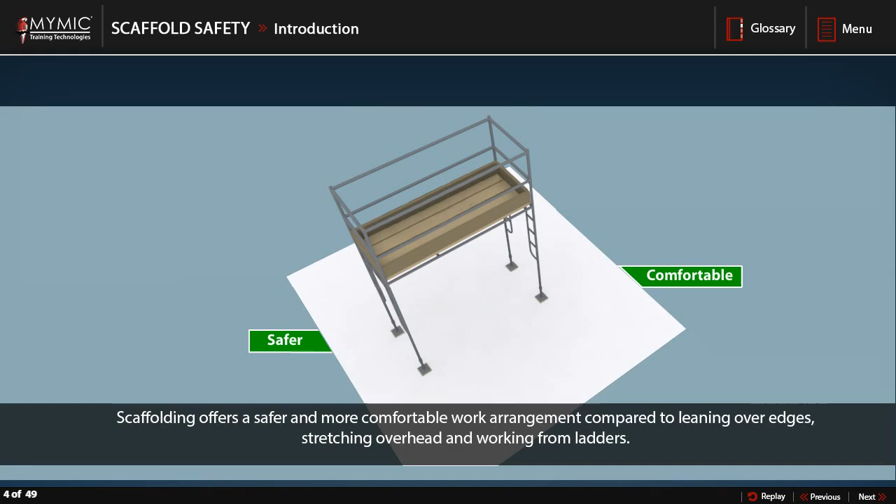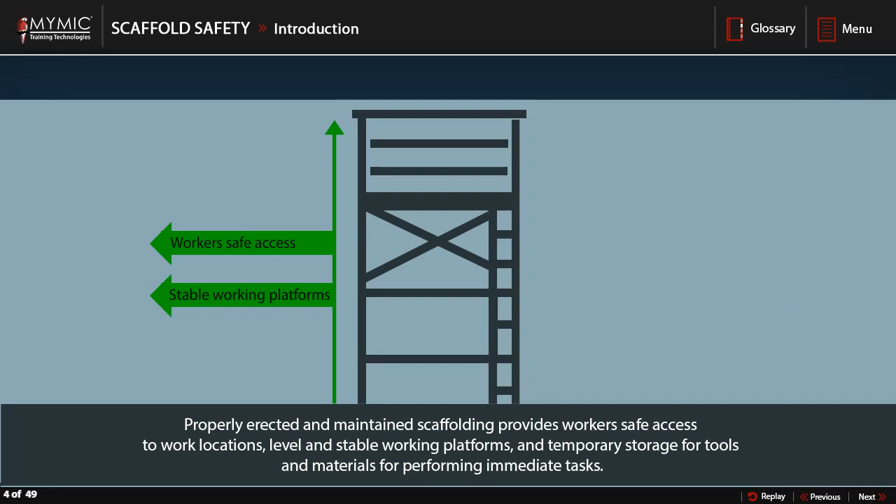Scaffolding offers a safer and more comfortable work arrangement compared to leaning over edges, stretching overhead, and working from ladders. Suitable and sufficient scaffolding must be supplied for work at elevations that cannot be accomplished safely by other means. Properly erected and maintained scaffolding provides workers safe access to work locations, level and stable working platforms, and temporary storage for tools and materials for performing immediate tasks.

In this program, you will learn the basic scaffold types and information to help you in selecting the right scaffold for the job. You'll also learn the guidelines for proper scaffold use, safe erection and dismantling procedures, and how to prevent damages to scaffolds by maintaining and storing them properly. In safe work practices, you'll learn how to work safely on scaffolds by avoiding falling hazards with the help of guardrails and toe boards, wearing safety harnesses, or the appropriate PPE. Finally, it covers safety training, which is required to use scaffolding safely.

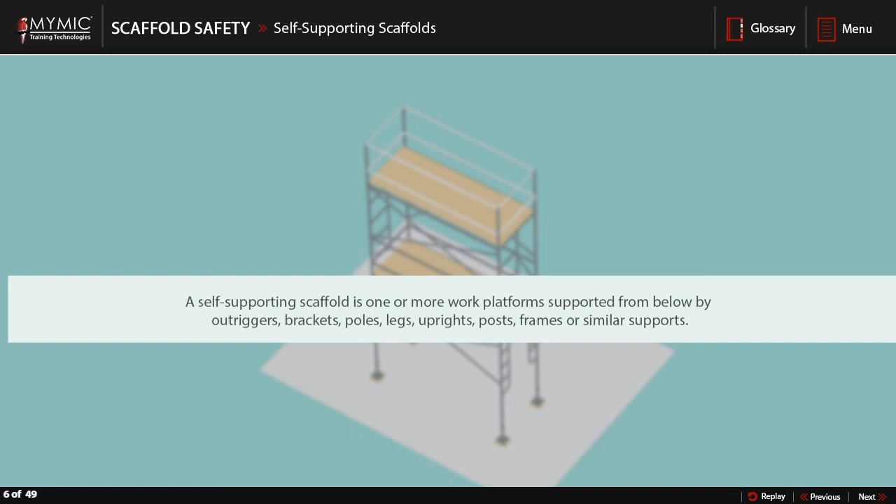Self-supporting scaffolds. A self-supporting scaffold is one or more work platforms supported from below by outriggers, brackets, poles, legs, uprights, posts, frames, or similar supports. Fabricated frame scaffolds are the most common type of scaffold because they are versatile, economical, and easy to use. The existing platforms remain until the frames are set, braced, and joined with stack pins. It must be designed by a registered engineer when over 125 feet. They also require guardrails installed with cross bracing.

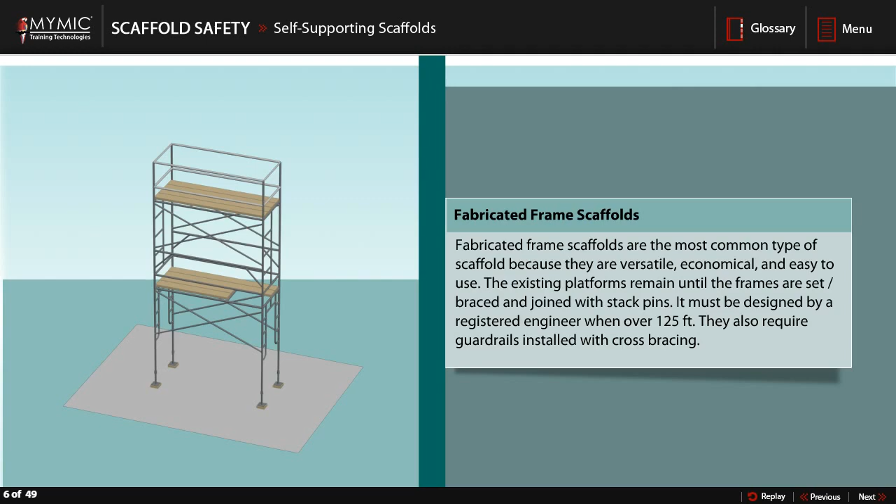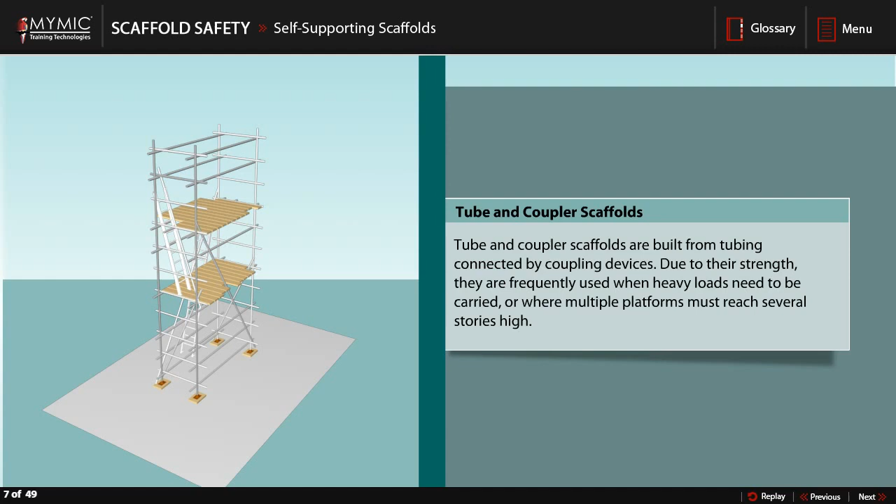Tube and coupler scaffolds are built from tubing connected by coupling devices. Due to their strength, they are frequently used when heavy loads need to be carried or where multiple platforms must reach several stories high. Mobile scaffolds are set on wheels or casters. They are designed to be easily moved and are commonly used for things like painting and plastering, where workers must frequently change position.

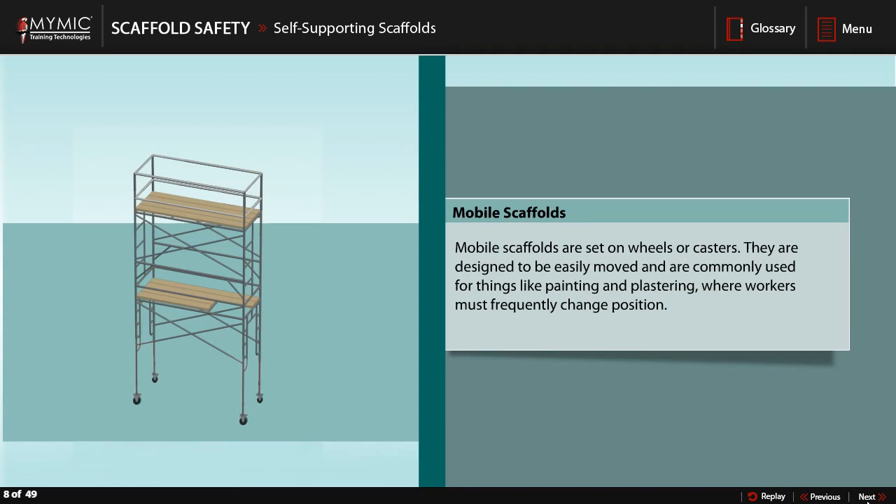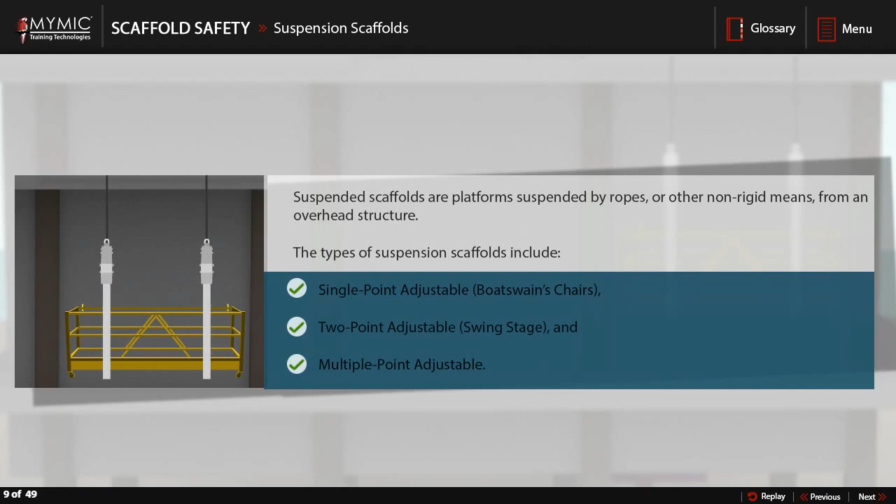Suspension scaffolds. Suspended scaffolds are platforms suspended by ropes or other non-rigid means from an overhead structure. The types of suspension scaffolds include single-point adjustable, Boatswain's Chairs, two-point adjustable, swing stage, and multiple-point adjustable. A single-point adjustable scaffold consists of a platform suspended by one rope from an overhead support and equipped with the means to permit the movement of the platform to the desired work levels.

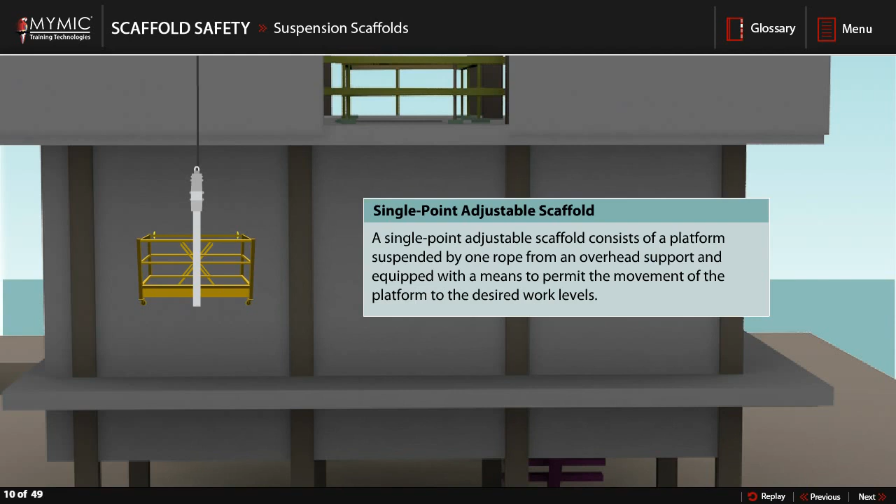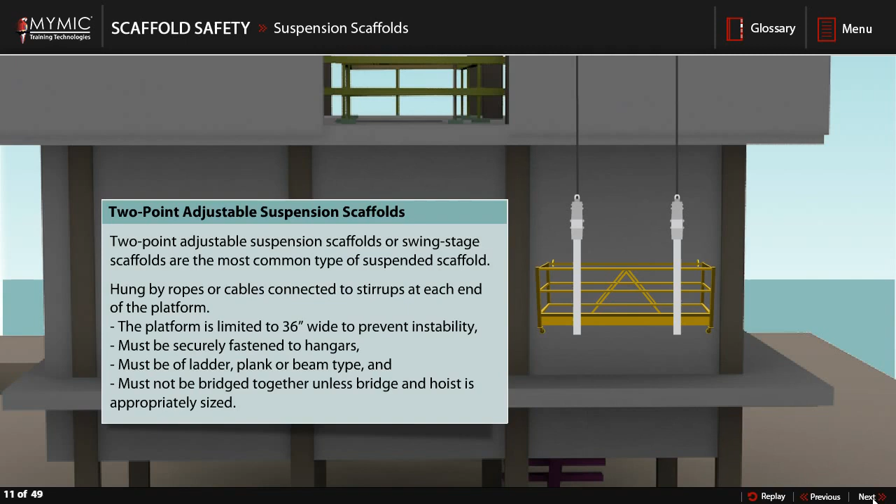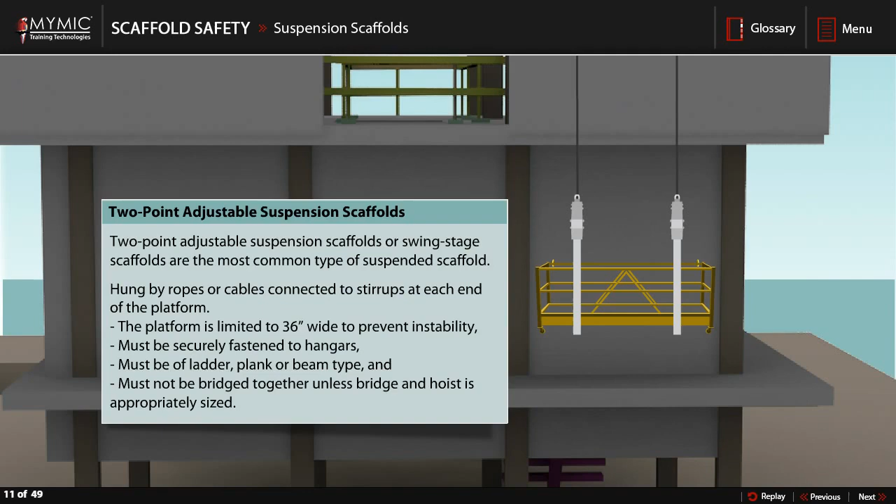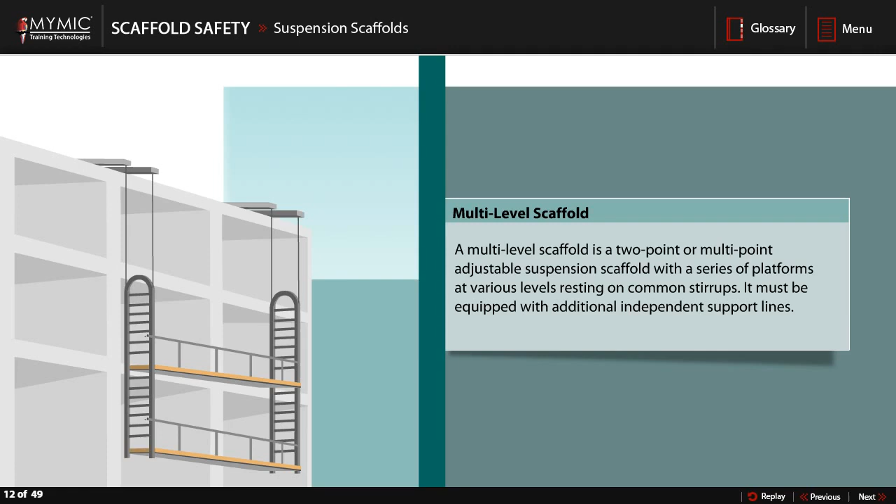Two-point adjustable suspension scaffolds or swing stage scaffolds are the most common type of suspended scaffold, hung by ropes or cables connected to stirrups at each end of the platform. The platform is limited to 36 inches wide to prevent instability, must be securely fastened to hangers, must be of a ladder, plank, or beam type, and must not be bridged together unless bridge and hoist is appropriately sized. A multi-level scaffold is a two-point or multi-point adjustable suspension scaffold with a series of platforms at various levels resting on common stirrups. It must be equipped with additional independent support lines.

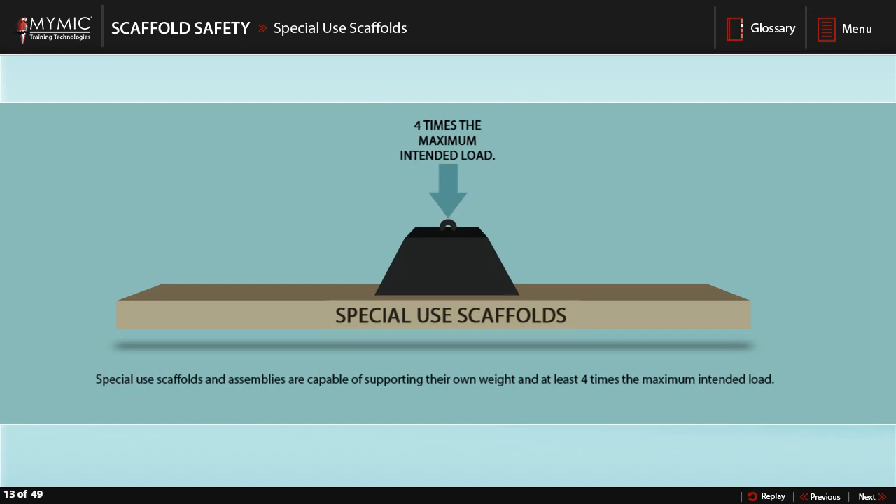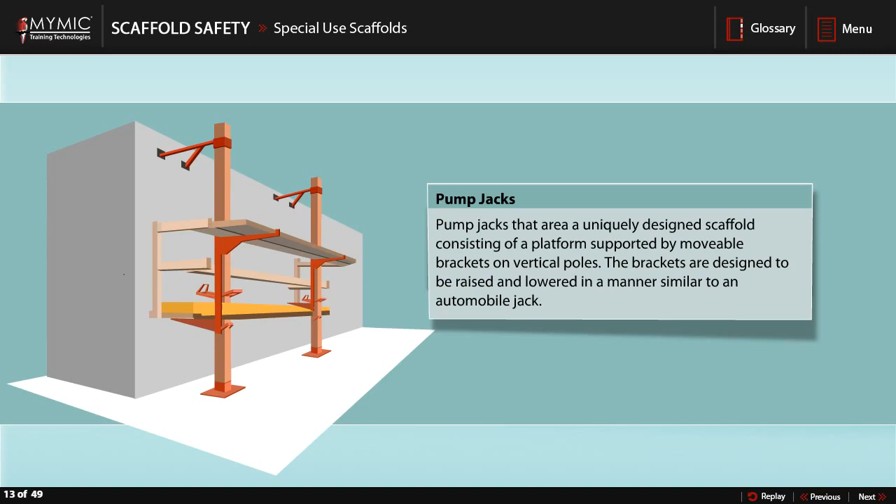Special use scaffolds and assemblies are capable of supporting their own weight and at least 4 times the maximum intended load. Some of the types of special use scaffolds include: 1. Pump jacks, a uniquely designed scaffold consisting of a platform supported by movable brackets on vertical poles. The brackets are designed to be raised and lowered in a manner similar to an automobile jack. 2. A ladder jack scaffold is a simple device consisting of a platform resting on brackets attached to a ladder. Ladder jacks are primarily used in light applications because of their portability and cost-effectiveness. Platforms should not be placed higher than 20 feet from the supported base.

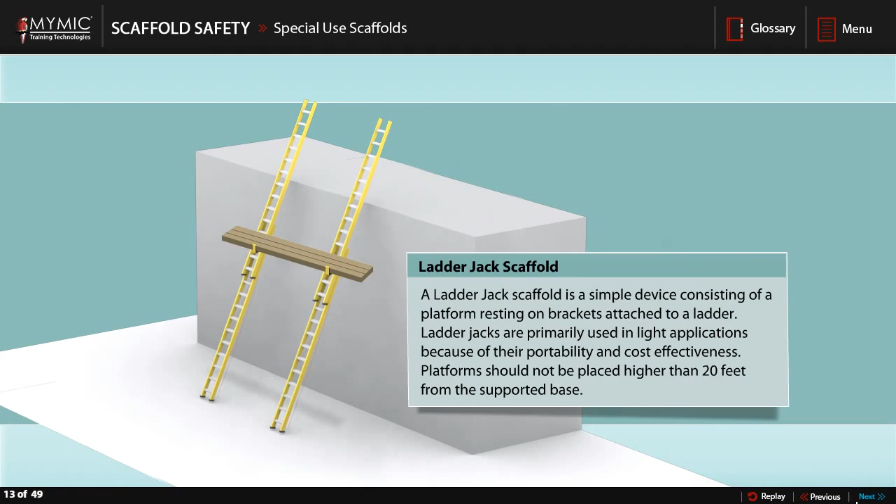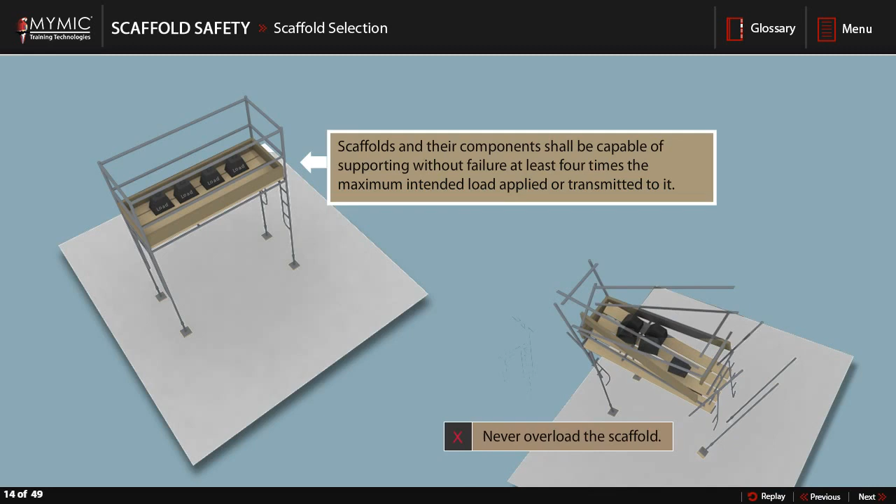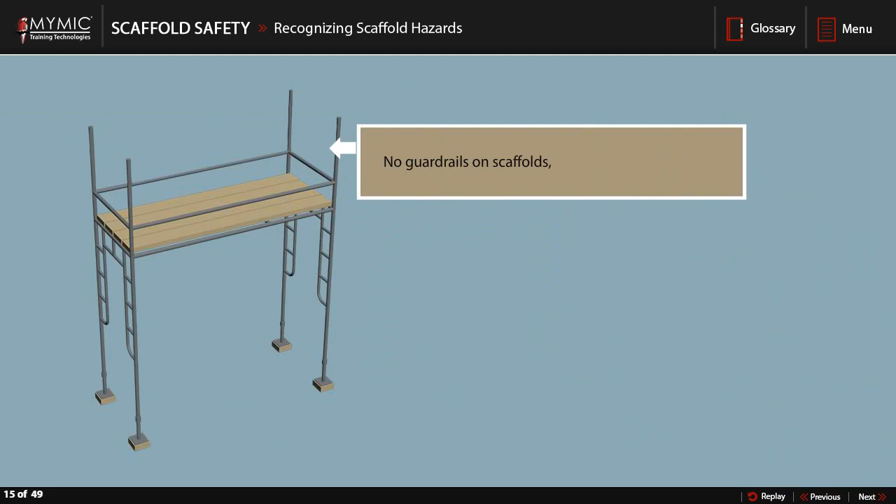Scaffolds and their components shall be capable of supporting without failure at least 4 times the maximum intended load applied or transmitted to it. Never overload the scaffold. The design load of all scaffolds shall be calculated on the basis of light, supporting 25 pounds per square foot, medium, supporting 50 pounds per square foot, and heavy, supporting 75 pounds per square foot. Some of the common scaffold hazards are no guardrails on scaffolds, defective wood planks and inadequate planking overhang, unsafe access to scaffold, cross-bracing not adequate, inadequate footings, and bridging of scaffolds.

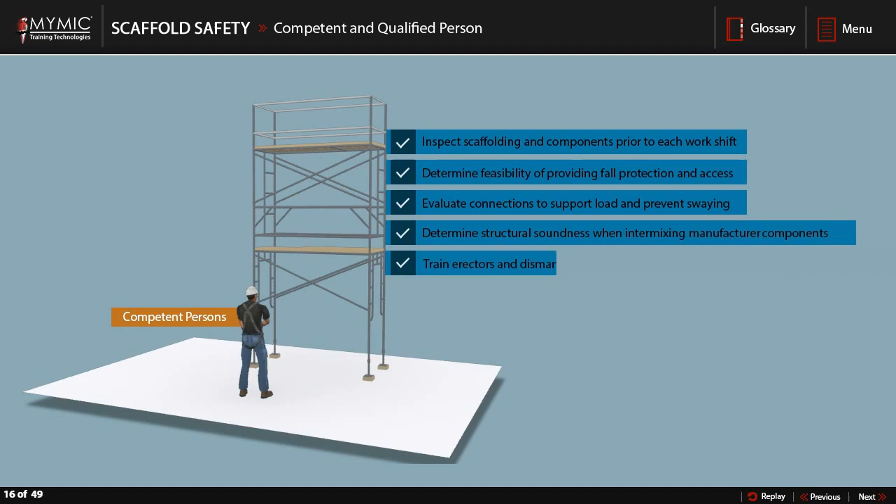A competent person must be capable of identifying existing and predictable hazards in the surroundings or working conditions. Their responsibilities include: inspect scaffolding and components prior to each work shift, determine feasibility of providing fall protection and access, evaluate connections to support load and prevent swaying, determine structural soundness when intermixing manufacturer components, and train erectors and dismantlers to recognize work hazards. Another person who is designated to ensure scaffold safety is known as the qualified person.

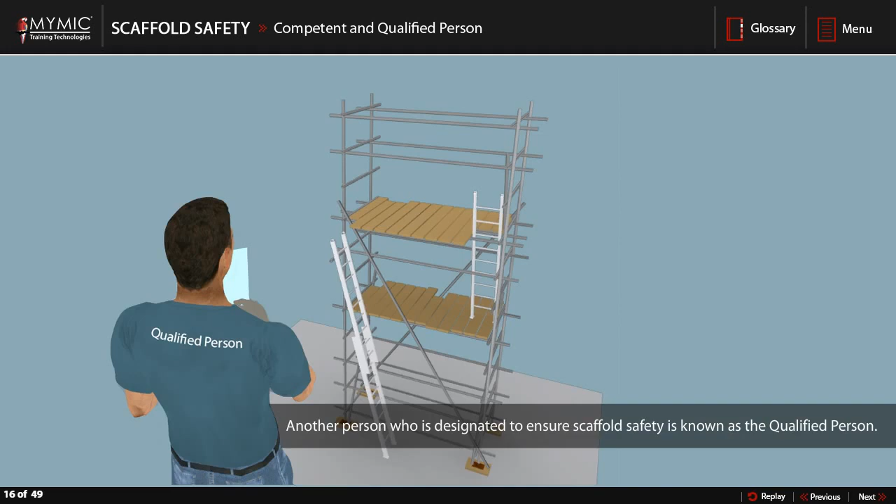A qualified person is one who, by possession of a recognized degree, or with extensive knowledge, training, and experience, is qualified to solve or resolve problems related to safe scaffold use. A qualified person may design a scaffold system to solve a site-specific problem.

To make sure scaffold components are in good working order, carefully inspect all scaffolding parts before and during its erection, and especially after changing weather conditions and prolonged interruptions of work. A defective or damaged part could affect the integrity of the whole scaffold.

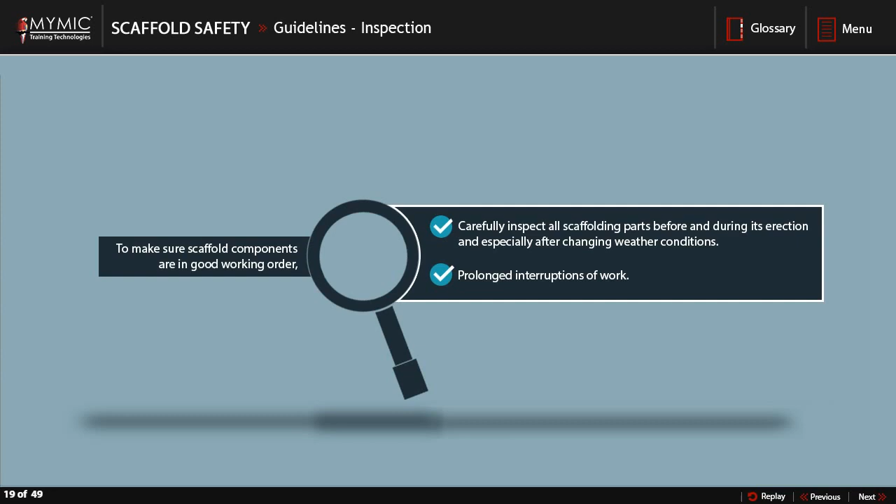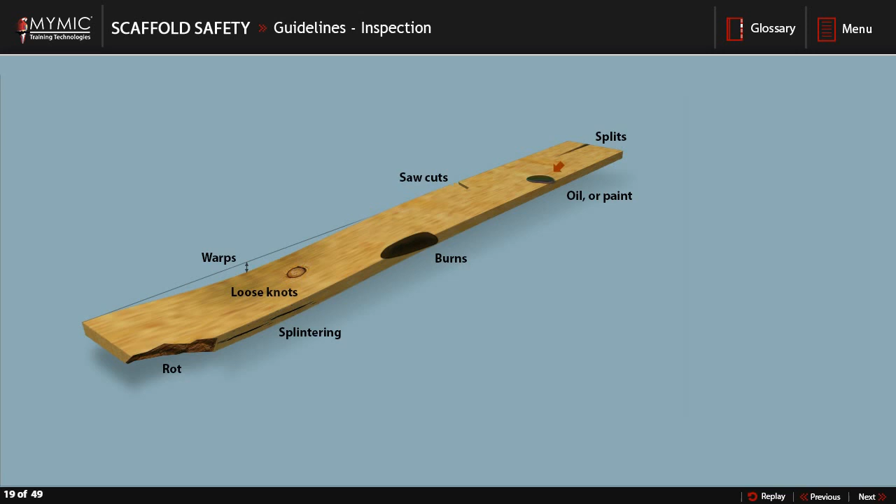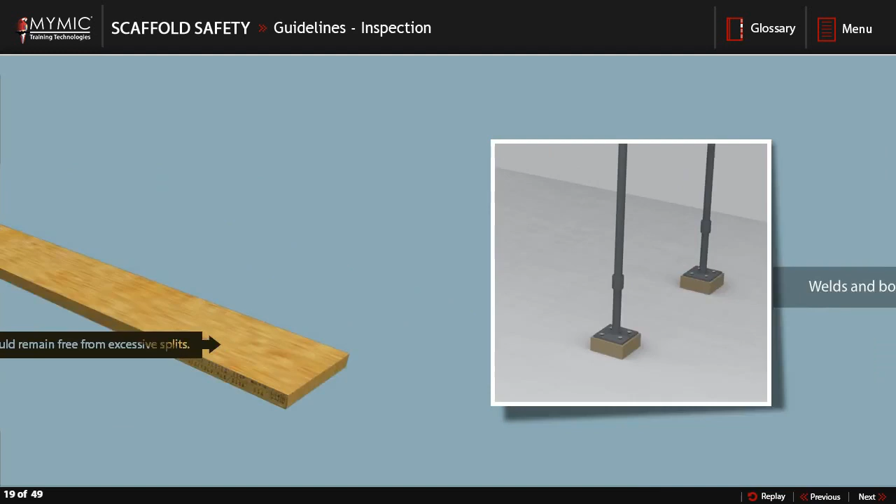Some areas to inspect include the following: planks and wood components free of splits, rot, burns, warps, saw cuts, any loose knots, splintering, oil or paint and opaque finishes that could cover potential defects. Planking shall be scaffold grade or equivalent and should remain free from excessive splits. Welds and bolted connections in good condition. Any damaged or weakened scaffold part must be immediately repaired or removed from service until it is repaired.

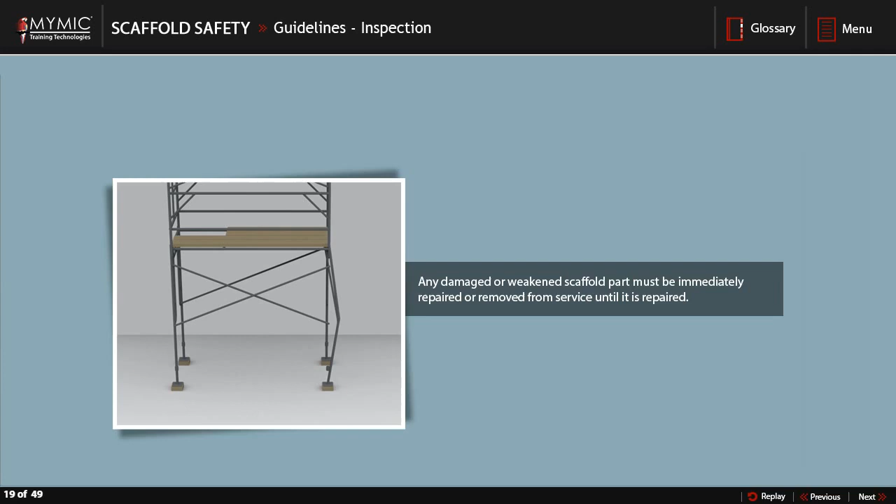Scaffold inspection tags are a vital part in creating a safe work environment for those who work on scaffolds. Some basics are: 1. Inspection and tagging of the scaffold is to be performed by a competent worker experienced in the erection of scaffold. 2. A unique scaffold identification tag number must be clearly identified on all tags for tracking purposes.

3. All scaffolds shall be inspected after the erection as per the Occupational Health and Safety Act requirements. 4. All scaffold identification tags will be of a solid green, yellow, or red color with black lettering. 5. All scaffold identification tags will have the front information displayed and must be completed for each tag.

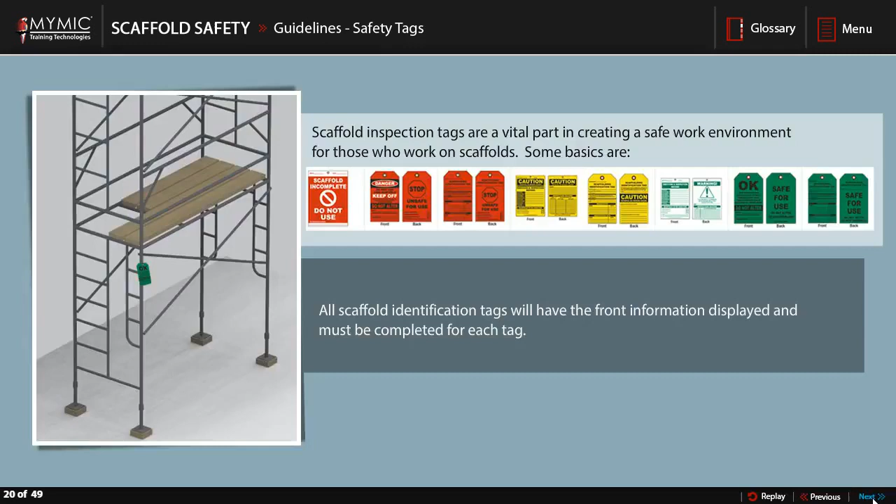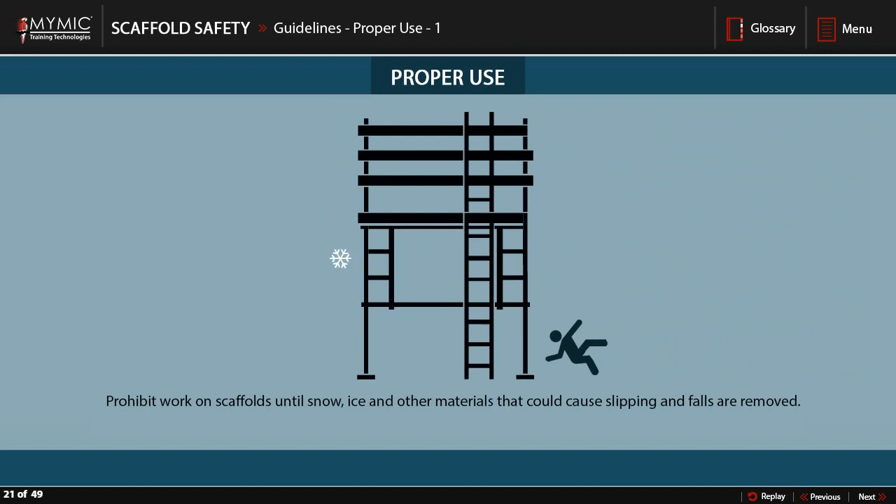Be certain that scaffolds and components are not loaded beyond their rated and maximum capacities. Prohibit the movement of scaffolds when employees are on them. Maintain a safe distance from energized power lines. Prohibit work on scaffolds until snow, ice, and other materials that could cause slipping and falls are removed. Prohibit scaffold use during storms and high winds. Protect suspension ropes from contact with sources of heat, welding, cutting, etc., and from acids and other corrosive substances.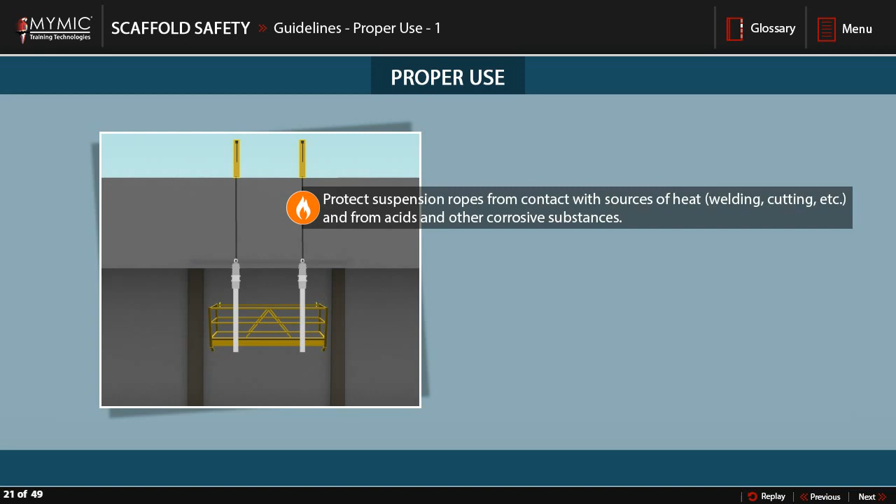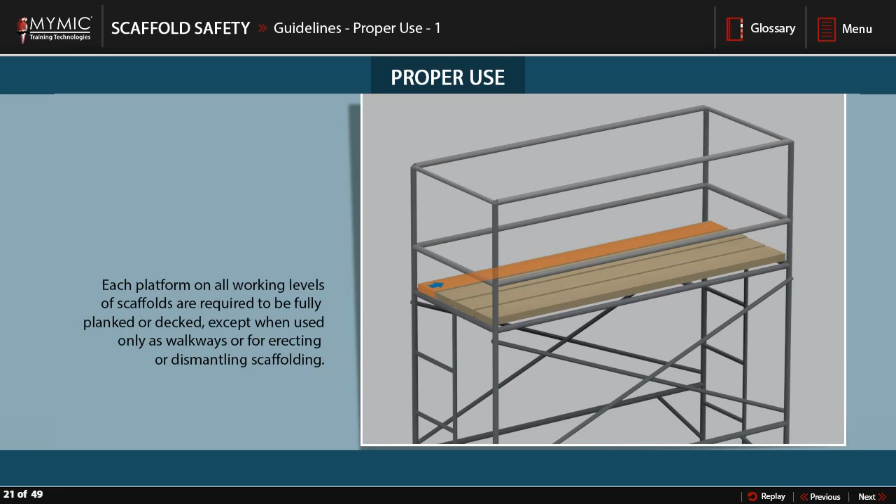Each platform on all working levels of scaffolds is required to be fully planked or decked, except when used only as walkways or for erecting or dismantling scaffolding. The platform and walkway must be at least 18 inches wide. Install each platform unit, plank, fabricated deck, or fabricated platform so that the space between planks and the space between the platform and the uprights is no more than 1 inch.

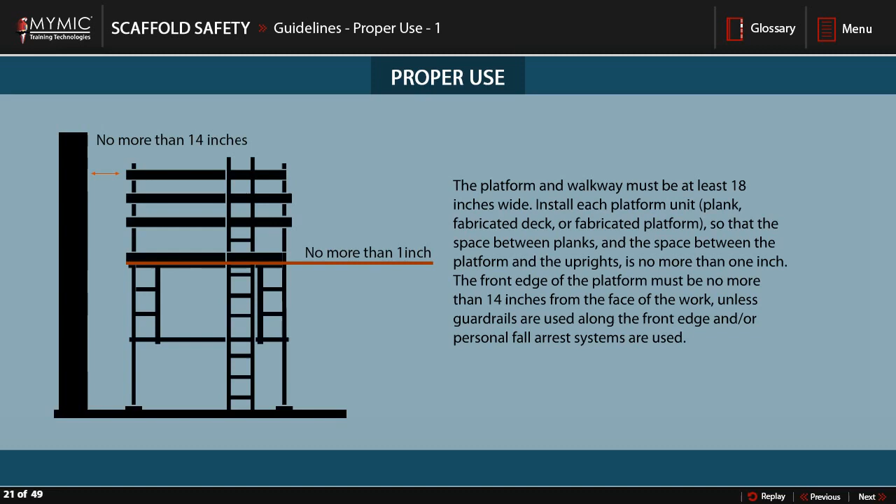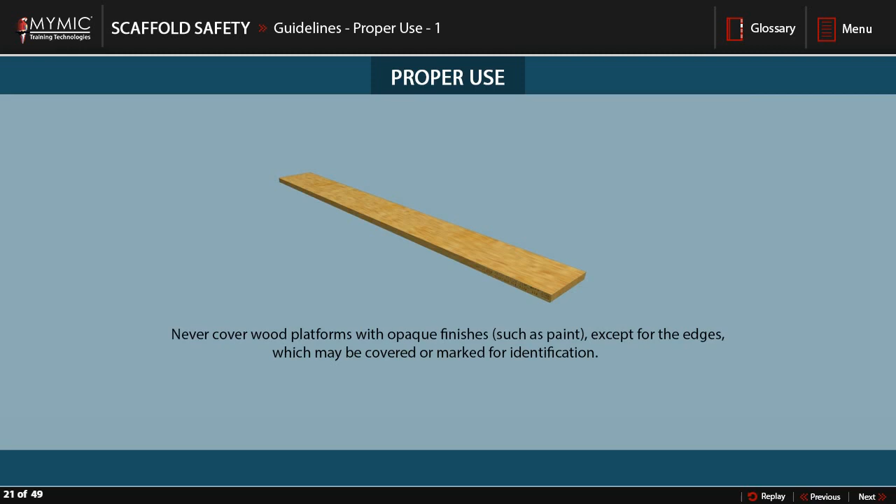The front edge of the platform must be no more than 14 inches from the face of the work, unless guardrails are used along the front edge and/or personal fall arrest systems are used. Never cover wood platforms with opaque finishes, such as paint, except for the edges, which may be covered or marked for identification. Remove debris and unnecessary materials from scaffold platforms. Prohibit the use of ladders and other devices to increase working heights on platforms. Report damage or defects to the competent person who will evaluate damage as well as take necessary corrective actions.

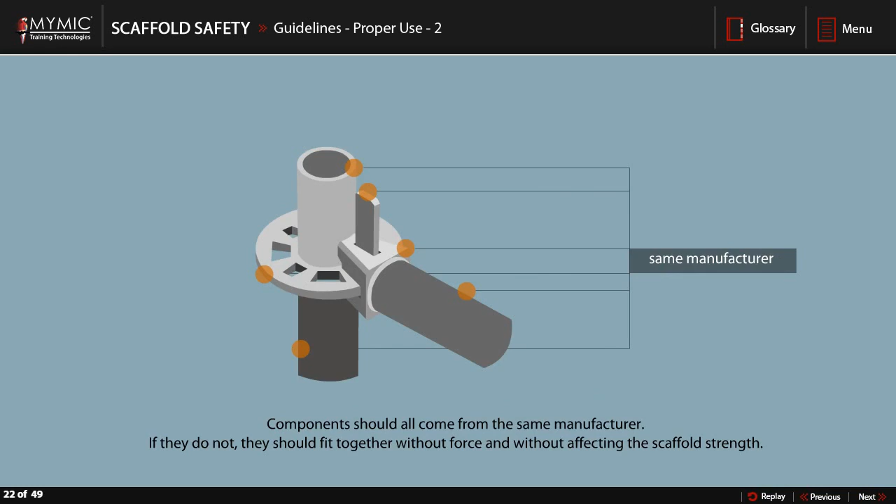Components should all come from the same manufacturer. If they do not, they should fit together without force and without affecting the scaffold strength. Do not modify components from different manufacturers to fit together without the competent person's approval.

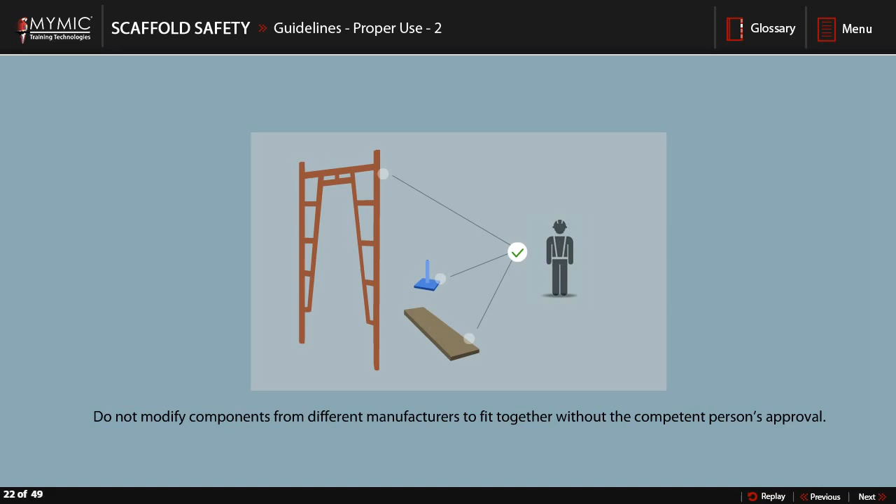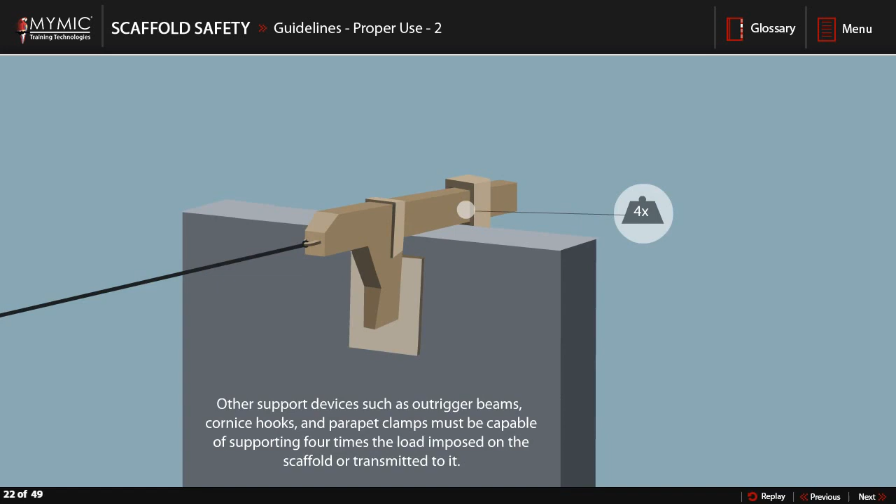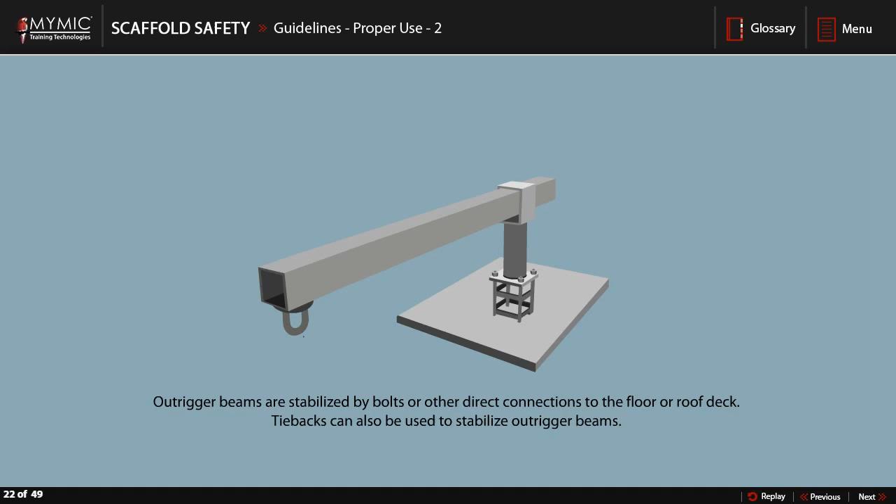On a suspended scaffold, support lines must be able to support 6 times the rated load capacity. Other support devices such as outrigger beams, cornice hooks, and parapet clamps must be capable of supporting 4 times the load imposed on the scaffold or transmitted to it. Outrigger beams are stabilized by bolts or other direct connections to the floor or roof deck. Tiebacks can also be used to stabilize outrigger beams.

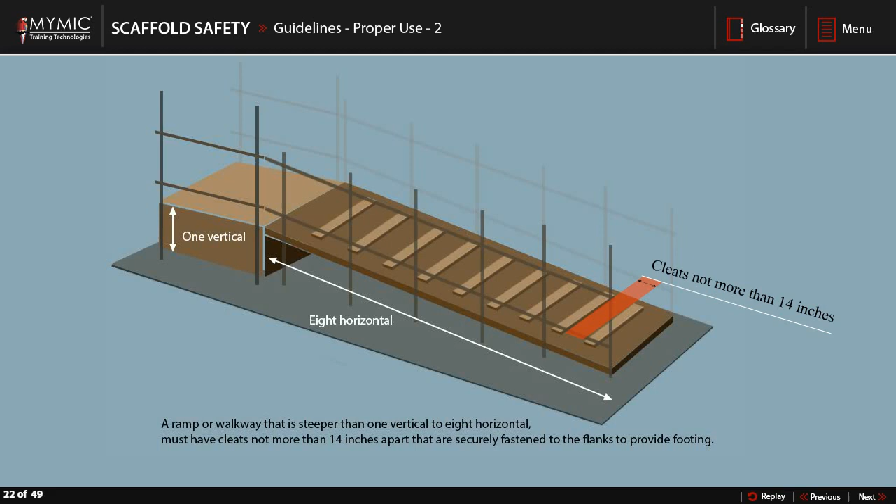All ramps and walkways that are 6 feet or more above lower levels must have guardrails. A ramp or walkway that is steeper than 1 vertical to 8 horizontal must have cleats not more than 14 inches apart that are securely fastened to the planks to provide footing. Ramps and walkways may not incline more than a slope of 1 vertical to 3 horizontal.

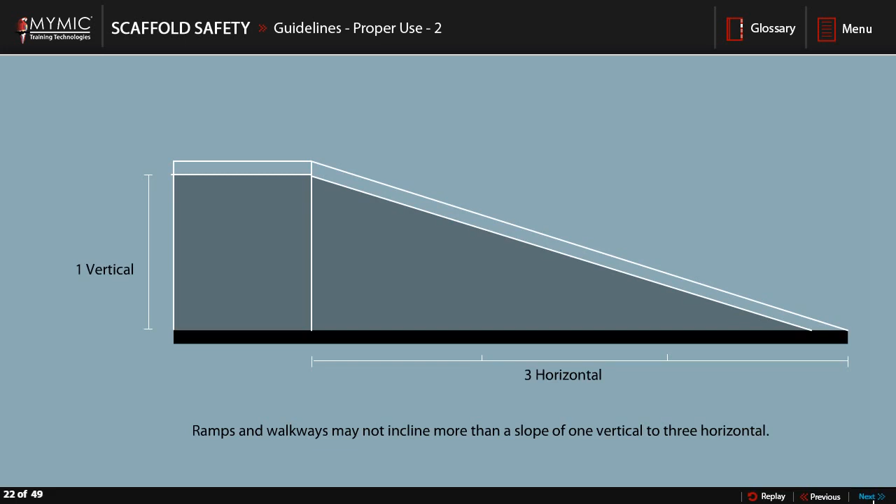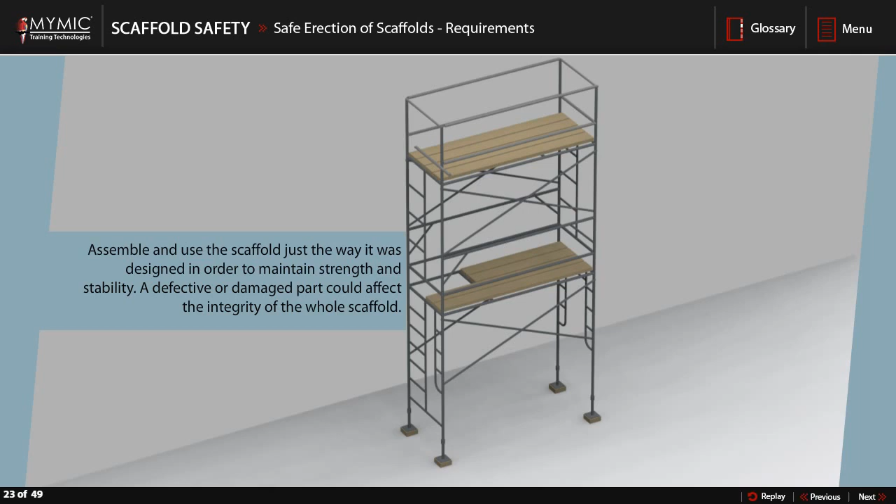Assemble and use the scaffold just the way it was designed in order to maintain strength and stability. A defective or damaged part could affect the integrity of the whole scaffold. Erect and dismantle all scaffolds according to the manufacturer's instructions and competent person's direction.

Pre-planning is necessary. Evaluation and preparation of the site. Identification of any potential hazards. Determining the type of scaffolding to be used, and activities to be performed and their weight requirements.

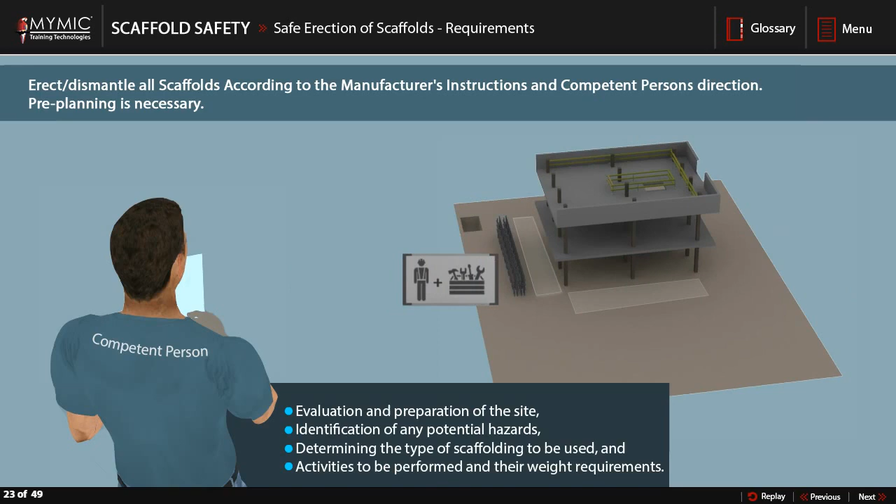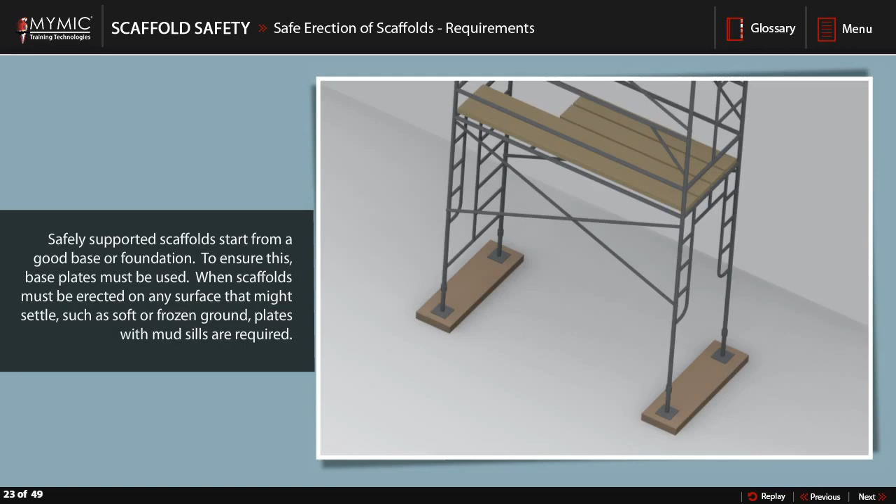Safely supported scaffolds start from a good base or foundation. To ensure this, base plates must be used. When scaffolds must be erected on any surface that might settle, such as soft or frozen ground, plates with mud sills are required. Many scaffold accidents occur when frozen ground thaws during work. A supported scaffold is never supported on boxes, loose bricks, or any materials that could be crushed or topple under scaffold weight.

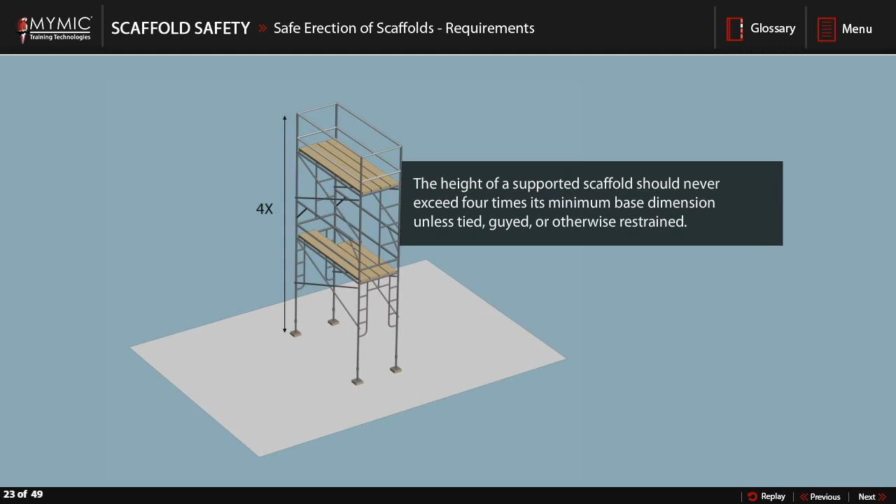Height requirements. The height of a supported scaffold should never exceed 4 times its minimum base dimension unless tied, guyed, or otherwise restrained. If greater height is required, outriggers can extend the base and serve as stability bracing to increase the base area.

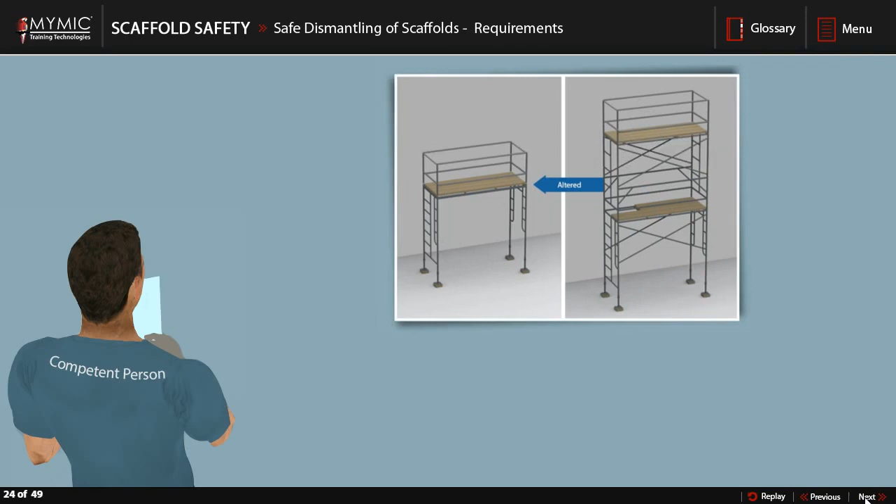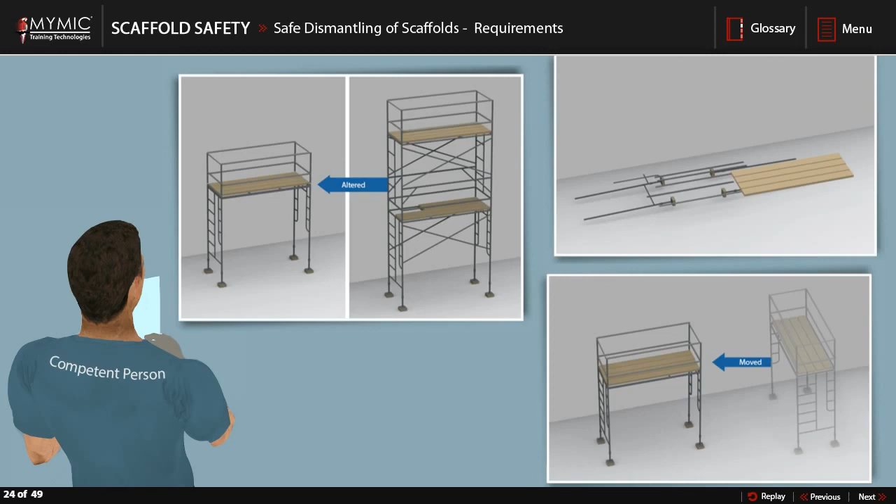Dismantling. Require that scaffolds be altered, moved, and dismantled under the supervision of a competent person. Alteration and dismantling activities should be planned and performed with the same care as with erection. Tag any incomplete scaffold or damaged component out of service. Before dismantling scaffolding, check that it was erected properly and that no structural alterations were made.

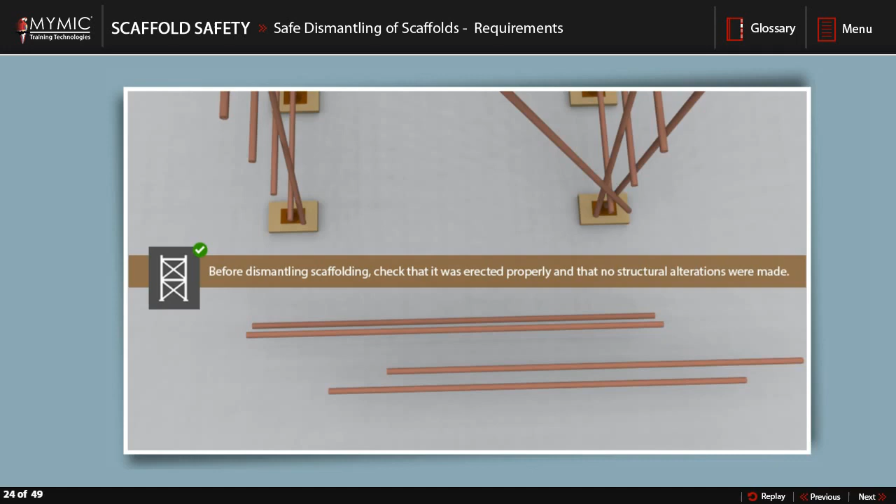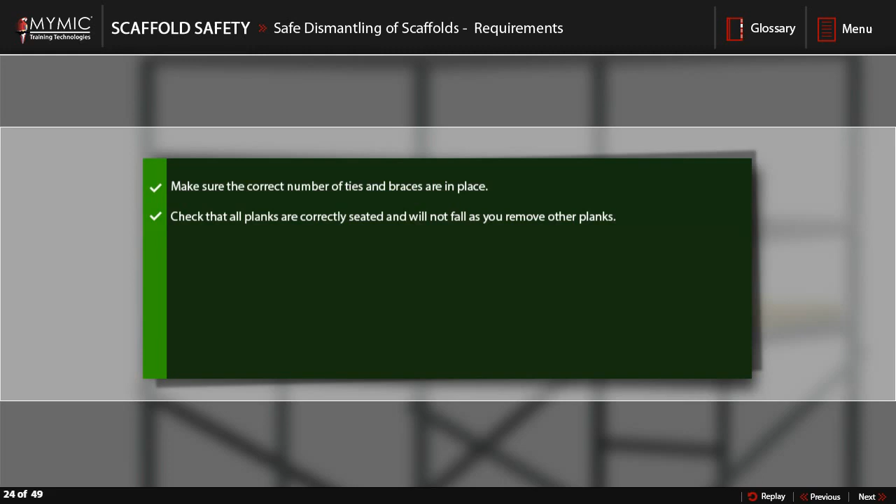Make sure the correct number of ties and braces are in place. Check that all planks are correctly seated and will not fall as you remove other planks. Lower all components to the ground by rope, hoist, or man-to-man, and in an orderly manner. Do not throw them off of the scaffold.

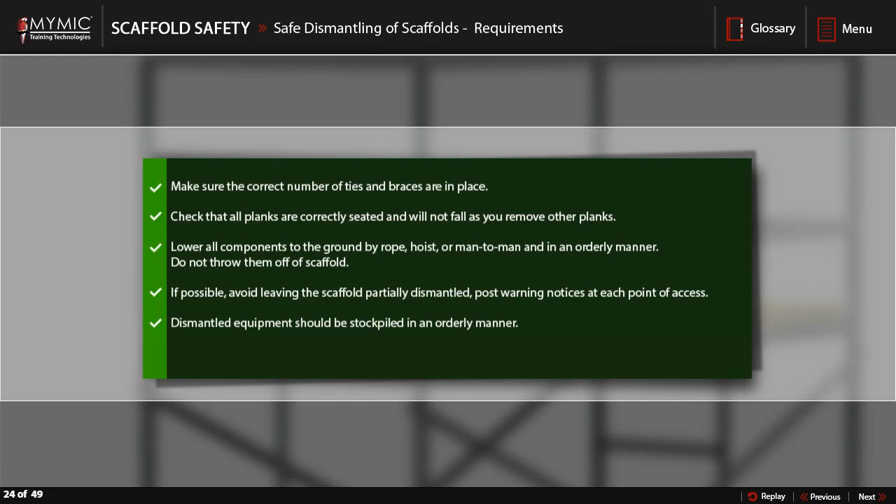If possible, avoid leaving the scaffold partially dismantled. Post warning notices at each point of access. Dismantled equipment should be stockpiled in an orderly manner. Always follow erection and dismantling procedures and manuals of the scaffold manufacturer.

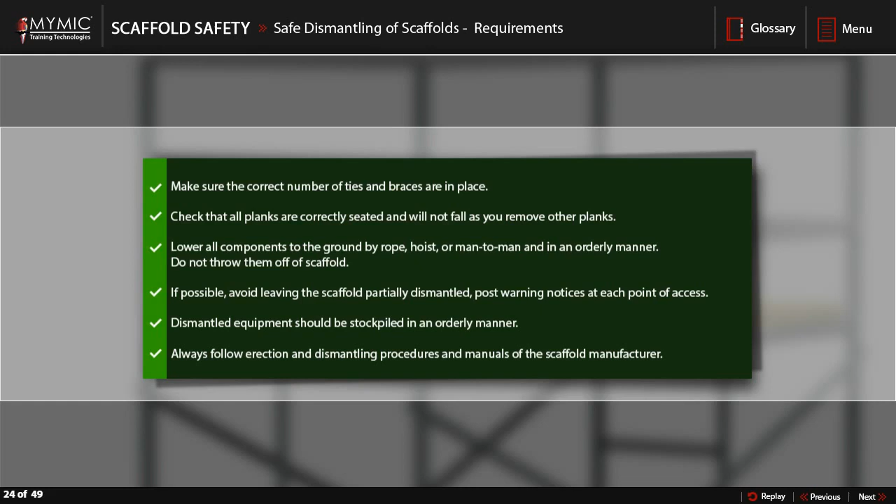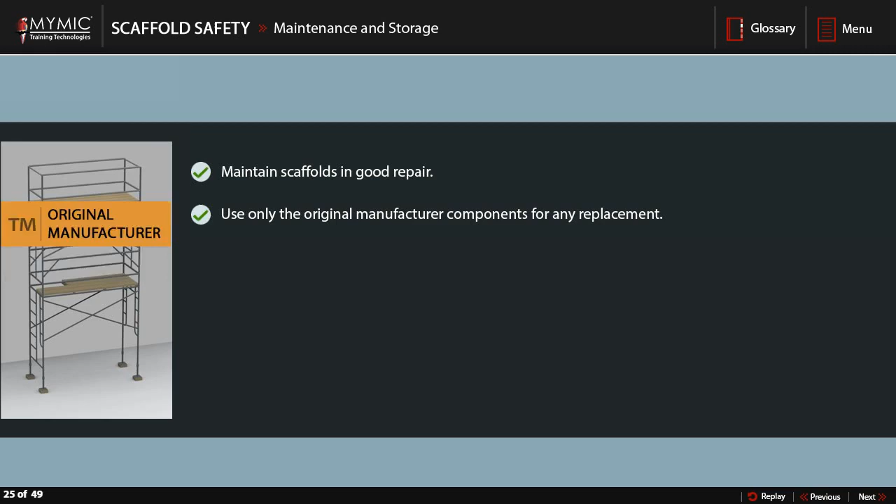Maintain scaffolds in good repair. Use only the original manufacturer components for any replacement. Fabricated scaffolds should be repaired according to the manufacturer's specifications and guidance. Job-built scaffolds should not be repaired without the supervision of a competent person.

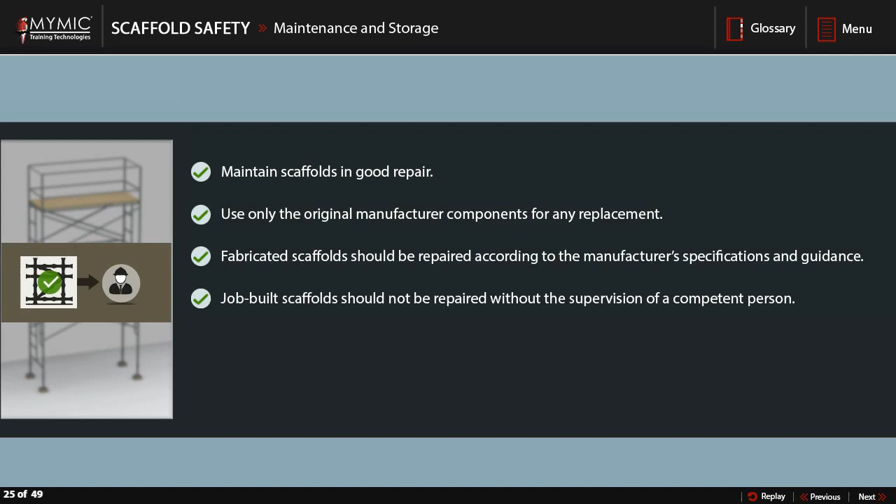Store all scaffolding parts in an organized manner in a dry and protected environment. Examine all parts and clean, repair, or dispose of them as necessary.

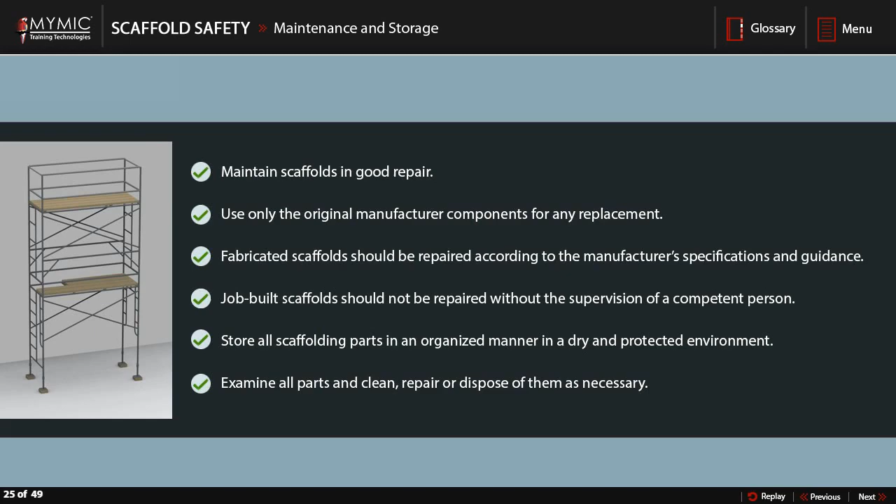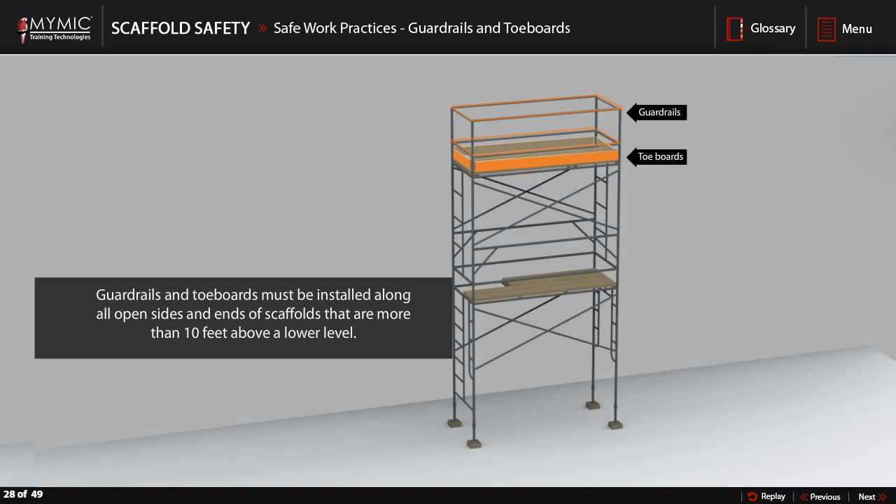Guardrails and toe boards must be installed along all open sides and ends of scaffolds that are more than 10 feet above a lower level. As per OSHA, after January 1, 2000, the top edge height of top rails on supported scaffolds must be installed between 39 and 45 inches above the platform. When mid-rails, screens, mesh, intermediate vertical members, solid panels, or similar structural members are used, they must be installed halfway between top rail and platform.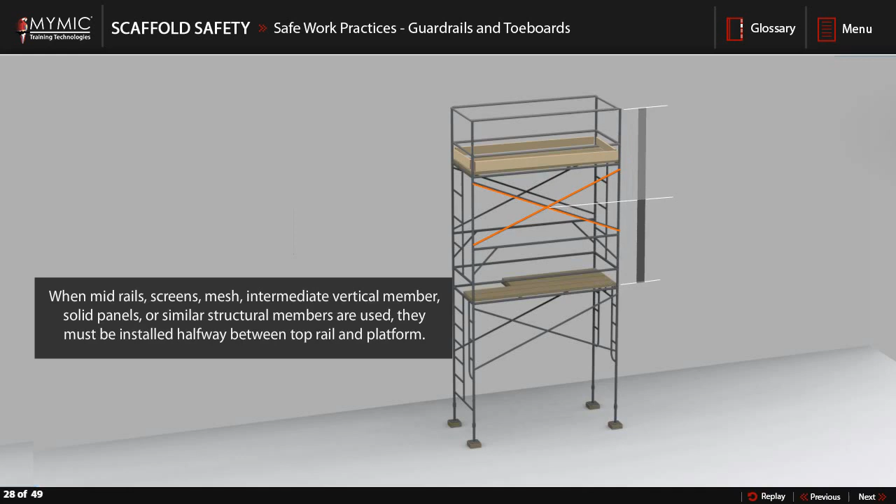Toe boards must be at least 3.5 inches high from the top edge to the level of the walking surface, have no more than 1/4 inch clearance above the walking or working surface, and be solid or have openings no larger than 1 inch in size. If tools, materials, or equipment are piled higher than the top edge of the toe boards, then mesh, debris nets, canopies, or other means of protection must be installed.

Personal protective equipment. Appropriate personal protective equipment shall be worn by all workers at all times. It may include eye protection with side shields and steel-toed safety boots. A hard hat must be worn whenever there is a possibility of being struck by falling objects. Consult with your competent person for questions about appropriate PPE for your job site.

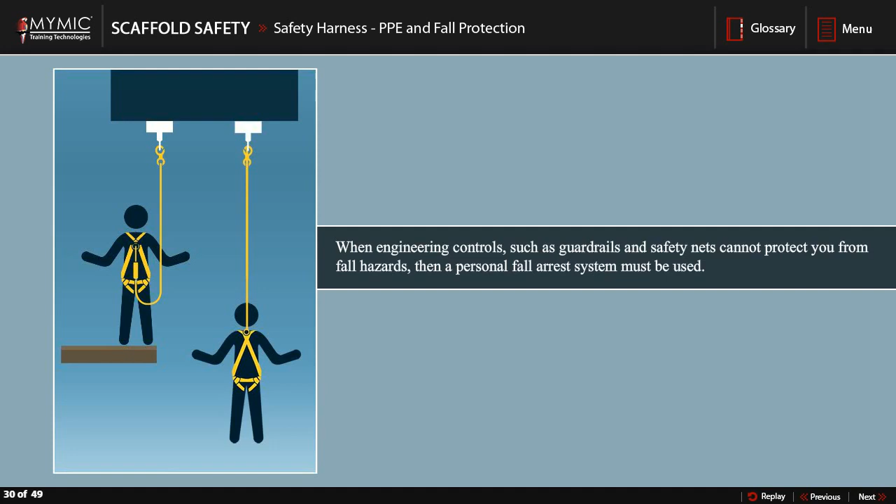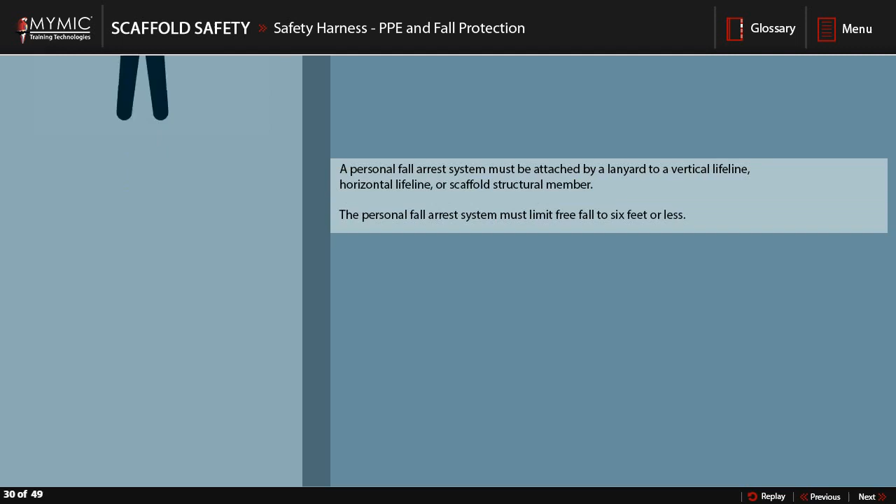Personal fall arrest systems. When engineering controls, such as guardrails and safety nets, cannot protect you from fall hazards, then a personal fall arrest system must be used. A personal fall arrest system must be attached by a lanyard to a vertical lifeline, horizontal lifeline, or scaffold structural member. The personal fall arrest system must limit free fall to 6 feet or less.

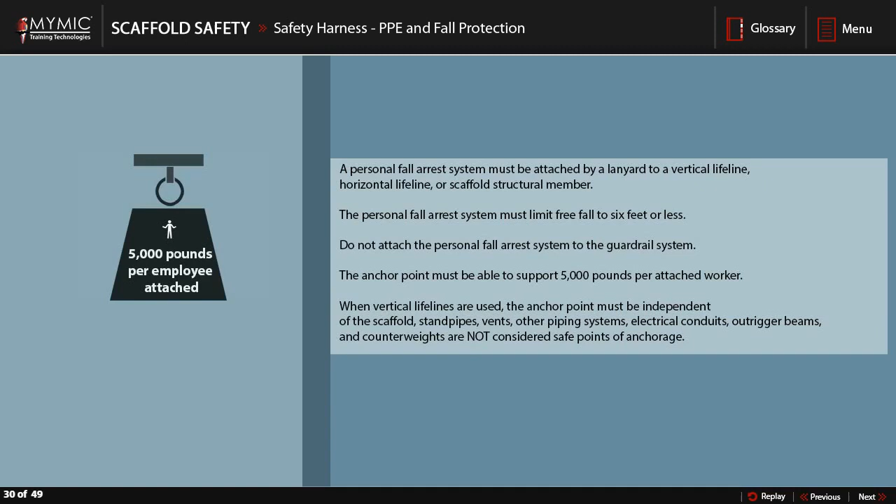Do not attach the personal fall arrest system to the guardrail system. The anchor point must be able to support 5,000 pounds per attached worker. When vertical lifelines are used, the anchor point must be independent of the scaffold. Standpipes, vents, other piping systems, electrical conduits, outrigger beams, and counterweights are not considered safe points of anchorage. Inspect the personal fall arrest system for wear, tears, cuts, and other signs of damage before each use.

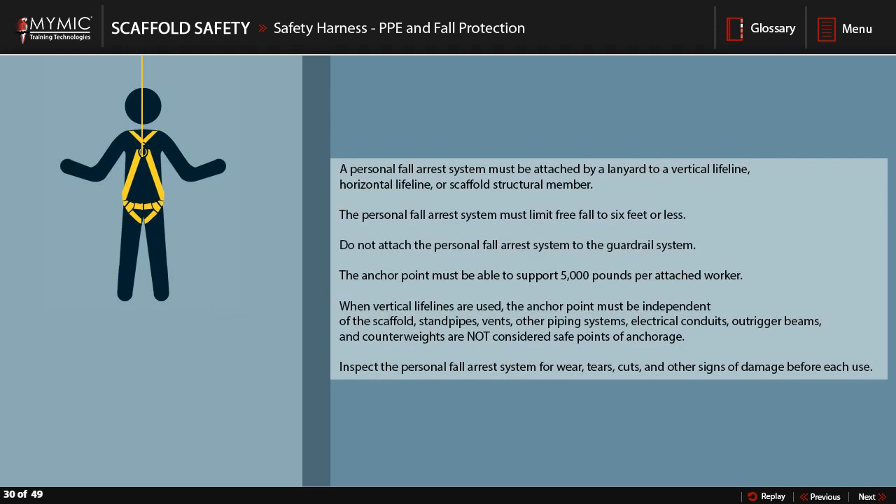Employees should receive training on the particular types of scaffold that they are to use. Training should focus on proper erection, handling, use, inspection, removal, and care of the scaffolds. Training must also include the installation of fall protection, guardrails, and the proper selection, use, and care of fall arrest equipment.

The competent person should receive additional training regarding the selection of scaffolds, recognition of site conditions, scaffold hazard recognition, protection of exposed personnel and the public, repair and replacement options, and requirements of standards.